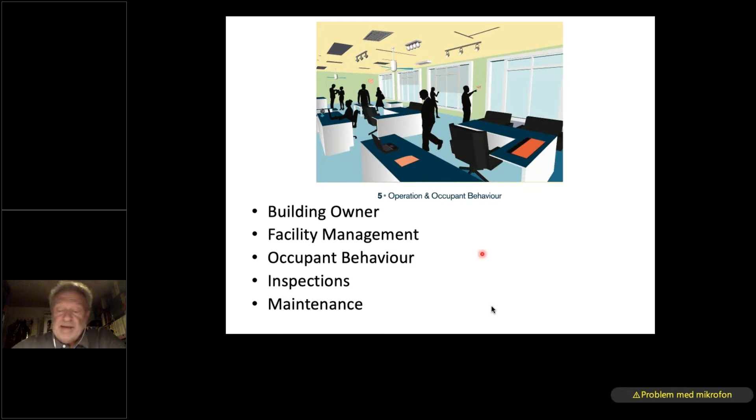We know from literature, from several studies - both field studies and laboratory studies - that occupant behavior can affect the energy use by more than 300%. We have seen from identical dwellings that the highest energy user is typically 2 to 3 times higher than the lowest.

Here are some data from more than 290 identical housing units in Denmark, so we are mainly talking about heating - only heating I'm talking about now. We should see on the graphic at the bottom that there is a huge distribution of the energy use in kilowatt hours per square meter per year, and here the number of housing. So we have some who are using very little, and some who are using 20 times as much as the lowest. It's about the same type of families, the same type of houses, but that's the variation you can really get in energy use.

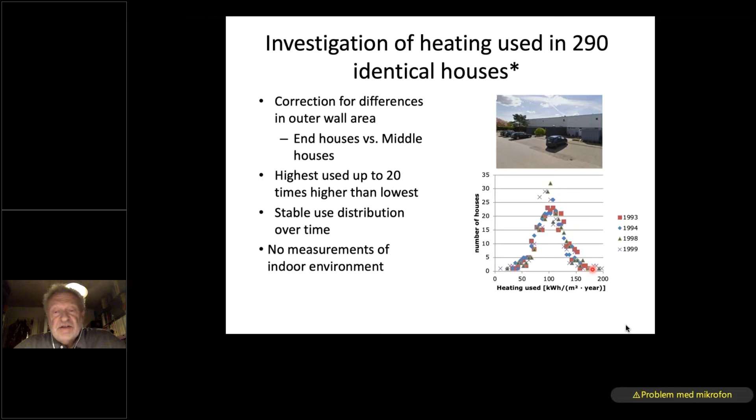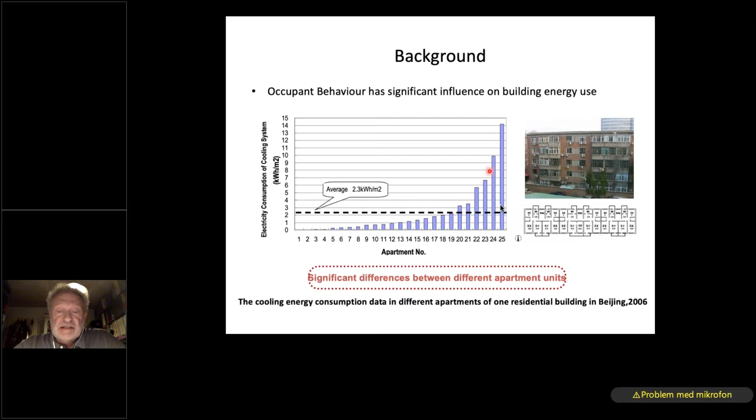Here's another example where we can see there is discrepancy between what we predict buildings will use and what they really use. For more than 135,000 Danish houses, we did calculations of the predicted use for their energy certificates - we have to do that for all new buildings, they need to get an energy certificate. And that's what we calculated. Depending on category A, you have a very low energy use - that's normally a newly constructed building with very good insulation and triple pane windows. And G is a very high level of energy use.

If you now look at what those buildings actually used - this is measurement of the actual use - you see that for low energy buildings, down here at A and B, we predicted they would use much less than they actually are using. But if we look at buildings with high energy use, in fact they are using less than we predicted. We had, at the beginning, a little difficulty explaining that.

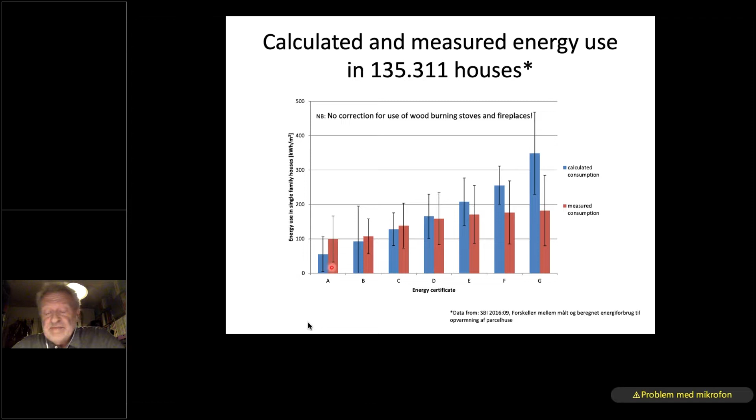It may be difficult for you from Brazil to understand, because in Denmark it's still mainly heating. Many people have their own fireplace or closed fireplace where they can do wood burning, and a lot of people, especially in old houses which are not well insulated, use this fireplace a lot - so the energy use is much smaller than we predicted. But for new buildings, which is where we are now, it seems like we are predicting lower energy use than we in fact get. So we are on the way to developing towards new near zero energy buildings.

If you're using traditional technologies like higher insulation, better windows, heat recovery, and building airtight, we also need to look at the HVAC system - for example, demand control ventilation so you don't ventilate more than needed, solar shading to control overheating, and daylight to reduce the cooling needs, control of lighting, and possible times of the year where it makes sense to open windows.

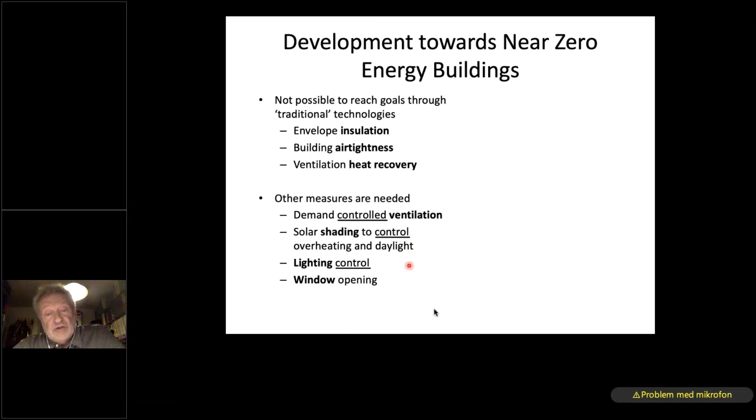So if you look at what the user can influence, those on top we can call robust technologies, because there's really no user interaction needed - the system works without people in the building.

But if you go below for the systems where the user can interact, they can change the setting, they can change the shading, and they can change the control. So they are very sensitive to occupant behavior.

We know from studies and literature that this behavior has an impact both on indoor environment and energy. And if a change occurs in a building that produces discomfort, people will react in a way so they try to get back to comfort again.

One thing is you can adjust to the environment. That means you can change your clothing if it's getting too warm, you may be able to lower your activity level, or lower your posture.

You could also have hot and cold drinks, but that doesn't really help that much. You can also adjust the environment by changing thermostat settings, maybe opening windows, changing the light and the shading.

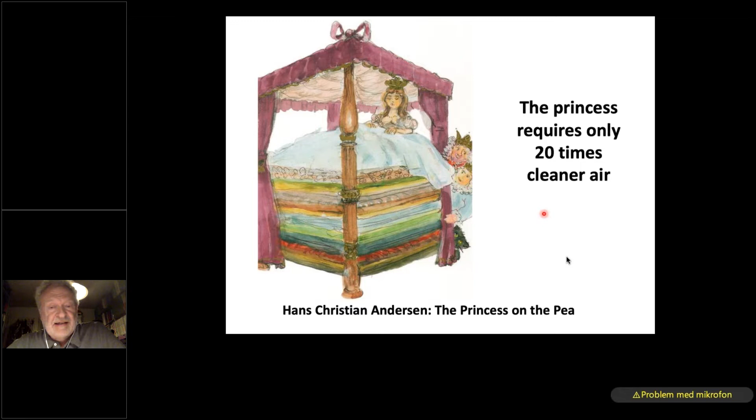When we talk about people, there's a big difference in what people prefer and how sensitive they are. There are some people who are very sensitive, like the princess and the pea from the fairy tale of Hans Christian Andersen - she can feel a pea which is below ten mattresses. If people are that sensitive, they would require an acceptable air quality with 20 times as much fresh air. So it's impossible to satisfy everybody, because we are individually different.

So occupants sometimes have to modify, for example, their clothing so they can all feel comfortable. There are ways to say how much adjusting clothing will impact the felt temperature. For example, if you take off a thin sweater, that would be the same comfort feeling as reducing the room temperature by 1.3 degrees.

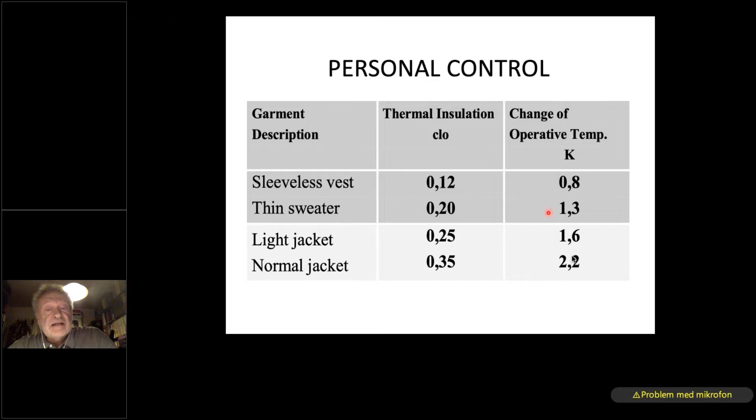So we have some possibilities to satisfy people through individual adaptation.

Occupant behavior has, during the last 10-20 years, been the focus of many research activities. The International Energy Agency has different annexes working on different topics, and we've had two annexes working on occupant behavior. We started a year or two ago a new annex on occupant behavior-centric building design and operation, which will generate a lot more knowledge.

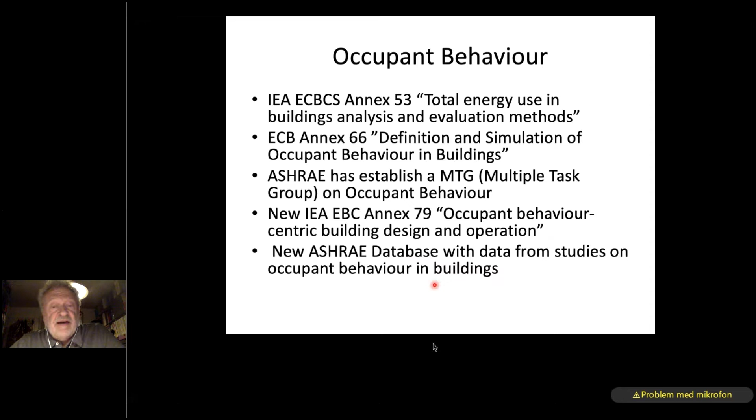ASHRAE has also put some focus on occupant behavior. We've started a multiple task group - not quite a TC yet, but the beginning of one - working with members from different TCs on the issue of occupant behavior. Recently we had an ASHRAE research project establishing a database with data from studies on occupant behavior in buildings, which researchers can now use to make new models or verify existing ones.

I'll give you a couple of examples of occupant behavior and its impact. Here's a case where we measured energy use and indoor environment in 39 apartments, where people paid according to how many square meters the apartment was - total energy use for the whole building was divided by the number of square meters. Then we had another apartment building with 17 apartments, where each apartment had its own energy recording.

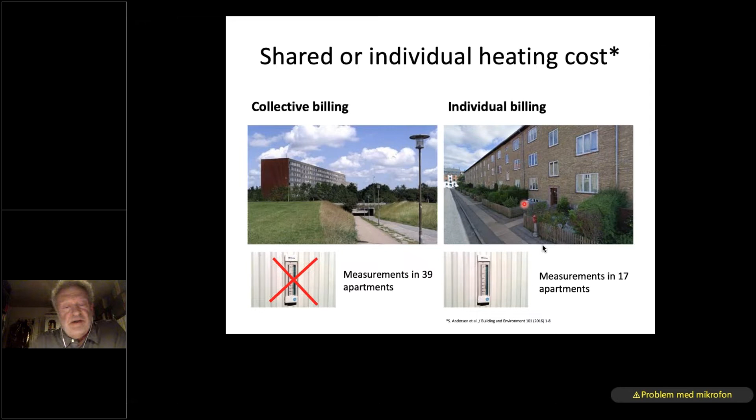They measured the energy for each individual apartment, and that influenced how people used their building. Looking at the broken lines - this is the proportion of the period where people have a temperature above a certain level - these are all from the building where people had individual meters. The average for those people is shown here, compared to those paying by square meter. You see that people who paid by the square meter kept a more comfortable temperature than the others. The others really tried to save energy by keeping a very low temperature in their homes, which may not be very comfortable and may also risk condensation and mold growth if the temperature is kept too low.

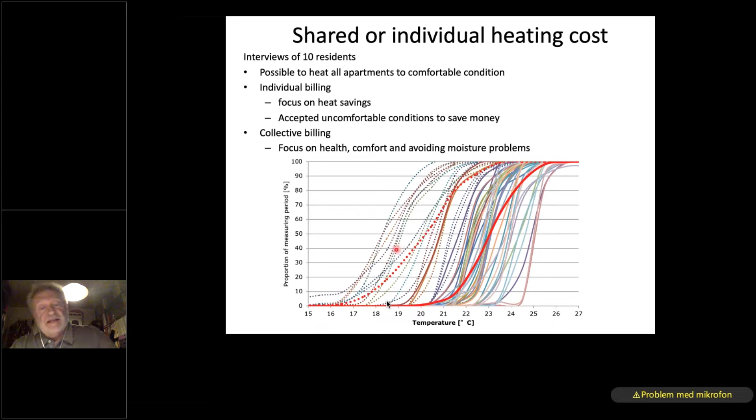We saw the same also with humidity. When we look at the ventilation, shown by the CO2 concentration, a higher CO2 concentration means you are ventilated less. Again, we saw that those paying by individual metering were not ventilating as much as the people who were paying per square meter.

So this influenced how people behave. Many people check their email each hour, their Facebook account, their bank account maybe once a week. But the energy meter, very few people are looking at every month on how much energy they're using. Maybe once a year when they get the bill for the energy. So people have no feeling about their actions and how it relates to the energy.

So feedback to people about their actions is also important. We will see more of that when we go into digitalization. We will have more sensors where we can get feedback to people on their occupant behavior.

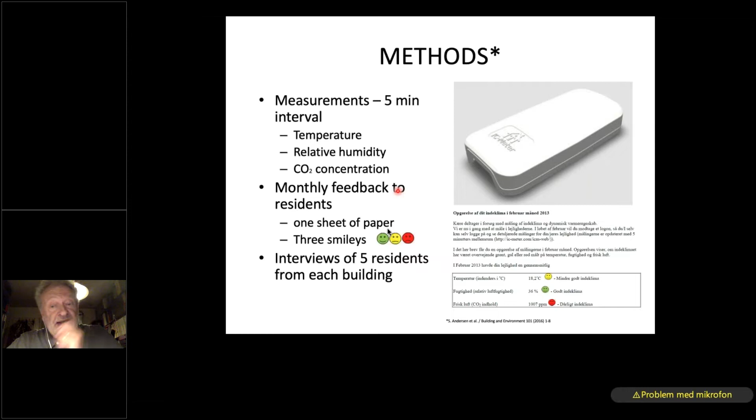We had another study where we were looking at feedback also, where we measured the indoor environment - temperature, relative humidity, and CO2 concentration - to relate to how much you ventilate. Then they got monthly feedback on their energy use, but also on the indoor environment. Each apartment had sensors. We could also record the window openings and when they changed the heating set point.

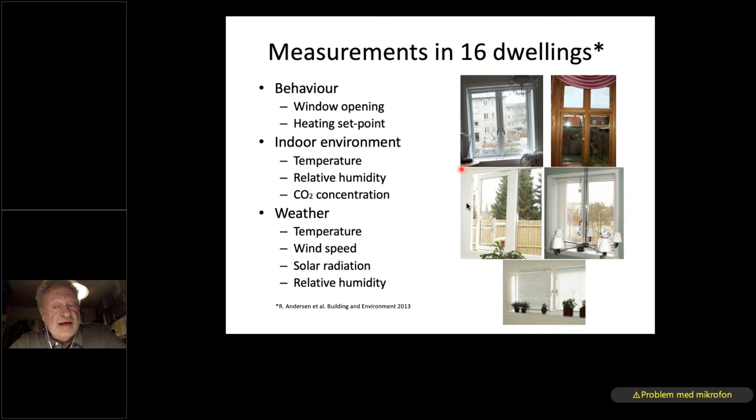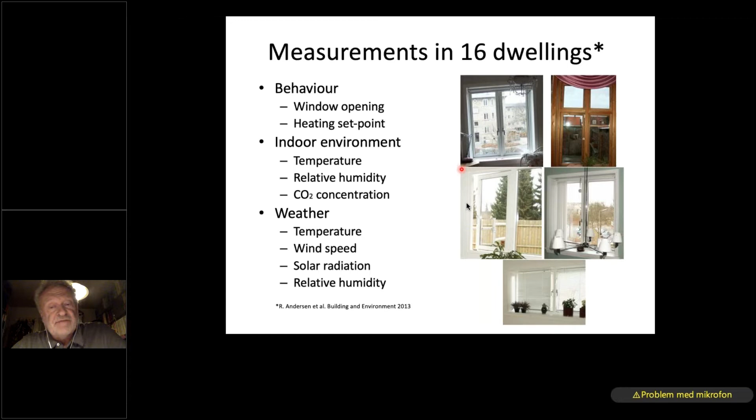Together with the outdoor environment and indoor environment, we got data so we could try to predict window openings from, for example, outside temperature, indoor temperature, or CO2 concentration. So we wanted to get some data for doing simulation of occupant behavior.

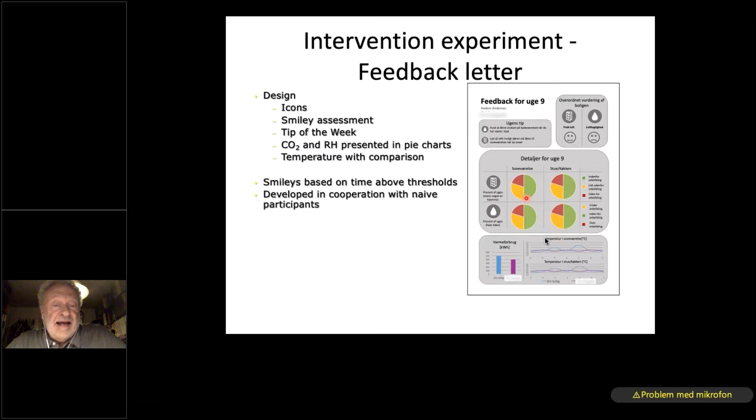We also gave some feedback. This was very simple feedback using smileys or icons telling about how they had been doing regarding energy use, how they had been doing regarding the indoor environment. So they got a feeling for, and could relate some of their actions in the house to the energy use.

In this way, we could persuade them, for example in the heating period, to run with a little lower temperature in the living room. We had a reference group in the same time that didn't get feedback. They did change the temperature in the living room a little, but not as much as those getting feedback. And the same was related to ventilation.

So feedback to people can help them behave better, so they get a better indoor environment, but also often they don't waste so much energy.

Let me give a couple of examples from schools. We are looking at a lot of schools because often the indoor environment in schools is not very good in many countries, also in Denmark. And many schools in Denmark, the ventilation is depending on, for example, window opening.

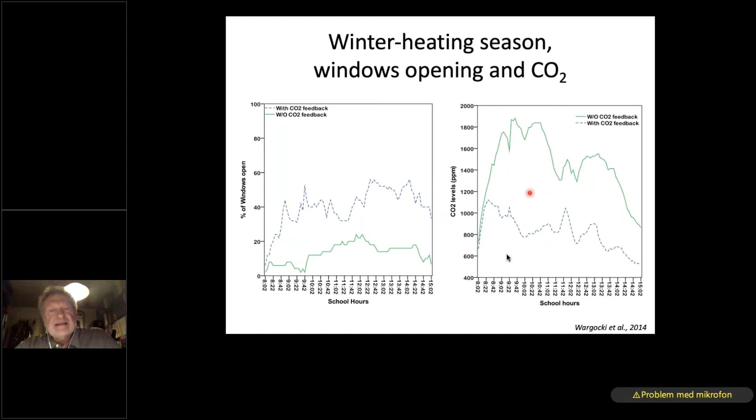In Denmark it's cool outside during winter, so they don't want to open the windows because they know it will be drafty and they can feel the cool air. That results in very high CO2 concentration. But if they get feedback that the air quality is bad, then you get lower CO2 concentration.

If you now look in summertime, without any active cooling in the classrooms, you see they are opening the windows a lot. And it doesn't really matter to give them feedback or not - they are very good at opening windows.

But the reason they open the windows is not because of bad air quality - it's because the temperatures are getting high. With a little lower outside temperature, they feel they can cool the classroom down by opening windows and doors. So again, it's not the air quality that makes them do the right thing and get more ventilation - it's the temperature.

So if you now give those people cooling in the classroom during summer, then we see the green line - they don't open the windows anymore.

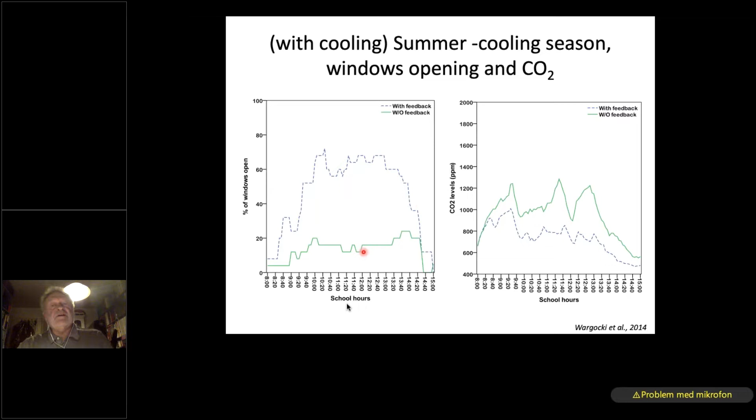No, the green is when they don't get feedback. When they don't get feedback, they don't open the windows anymore. But with the feedback, again, they open windows. So these are some of the things where, for example, feedback to the teachers is very important.

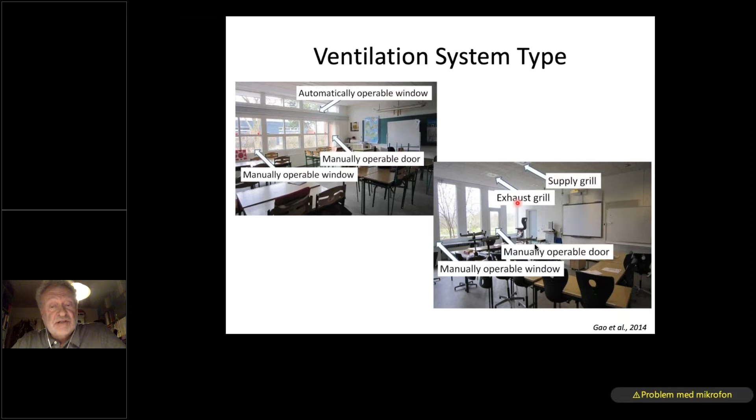So we looked at different ventilation system types in buildings. We had manual operable windows, automatic controlled opening of windows, maybe combined with exhaust, or we had a balanced ventilation system. And you see the ventilation rate, which relates to indoor air quality.

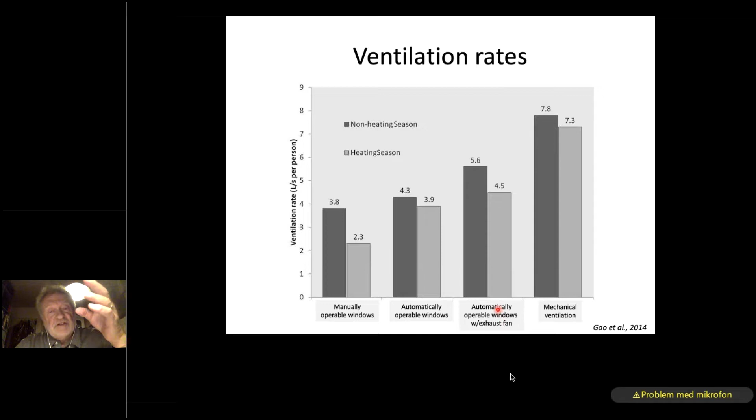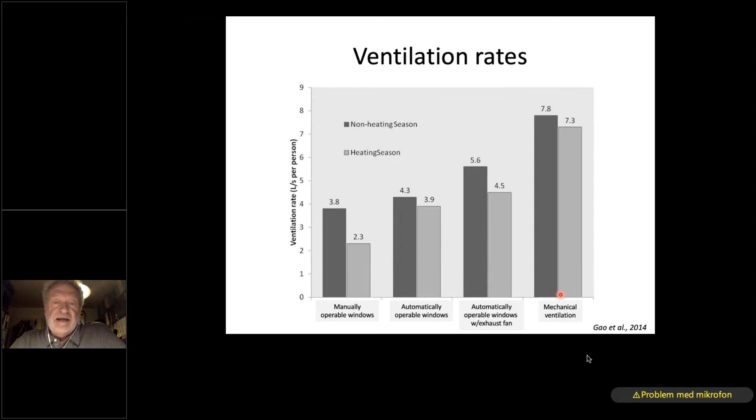In the non-heating season, they had more ventilation. That is, in the summertime, they had more ventilation. That's black in all types of ventilation system. Here is manual operable windows, automatic opening of windows according to a CO2 sensor, automatic opening of windows combined with an exhaust fan, which gives you more ventilation, and mechanical balanced ventilation. So you see, the mechanical balanced ventilation more or less guarantees you the right level of ventilation.

There are many factors that can influence what people are doing. So window opening drivers could be things like feeling too warm, and it's summertime. The heating set point depends on the temperature and so on. Also window and blind use may be influenced if you want to look out. Is it a nice environment? Do you want more daylight? So many things can influence how people behave.

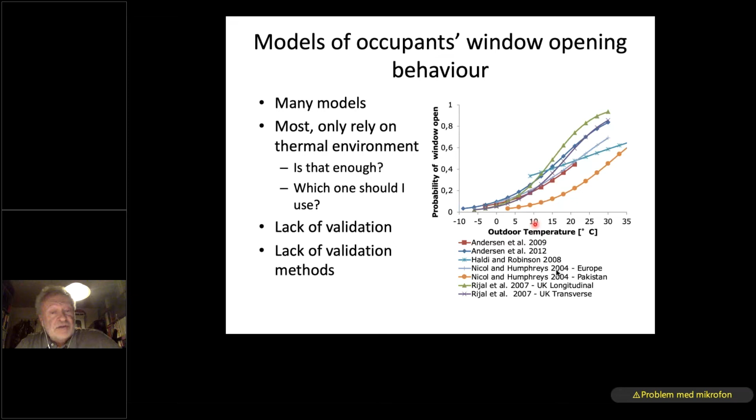And what we would like to do is model human behaviors. We want to know more about what the drivers are, and that's why we need data. That's why ASHRAE established this database. So here is a prediction: what is the probability that you will open a window based on the outdoor temperature? These are different predictions, and you can build these predictions into a computer simulation. I'll just skip this one here.

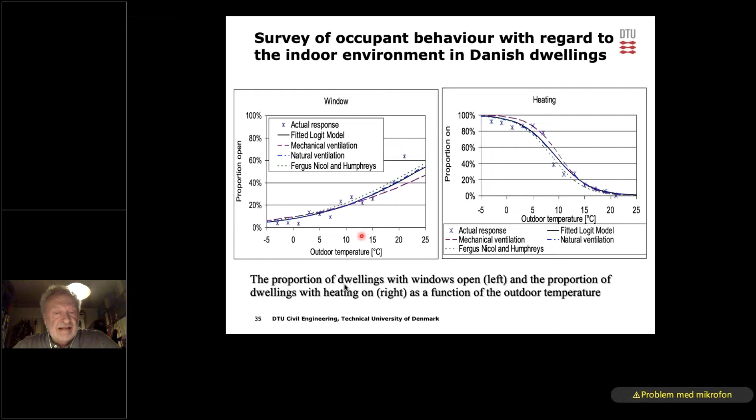So to establish different models, for example on window openings and set points depending on outdoor temperature, we need data so we can make these relations. There has been a lack of data, but we are seeing now from different activities, including the annexes I talked about, that we are getting more data.

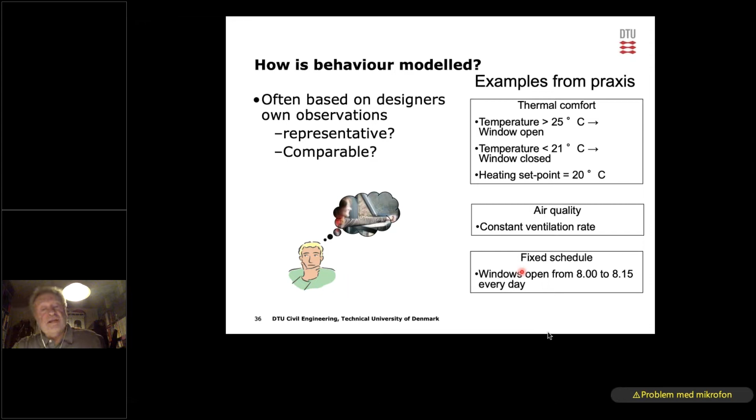So today, when you simulate a building and the occupant, it's often based on you deciding how the occupant behaves. For example, you say when the indoor temperature gets above 25, you start the air conditioning or open windows, and when it gets below 21, you close the air conditioning. For air quality, normally you have a constant ventilation rate. Now we have a bit more with demand control ventilation, but often it's a constant rate and a fixed schedule. For example, for window opening in schools, they are open between this hour and this hour.

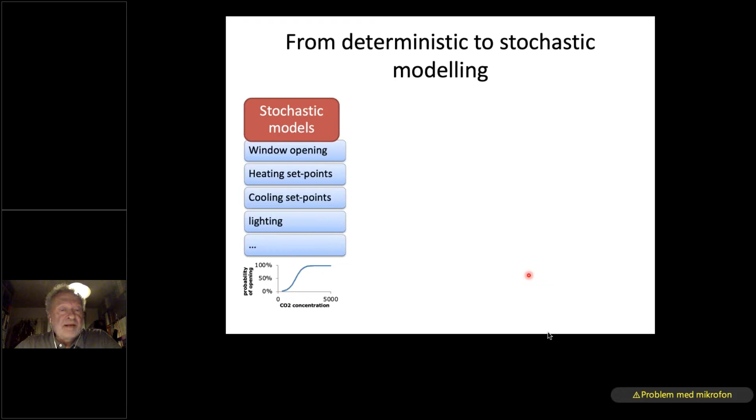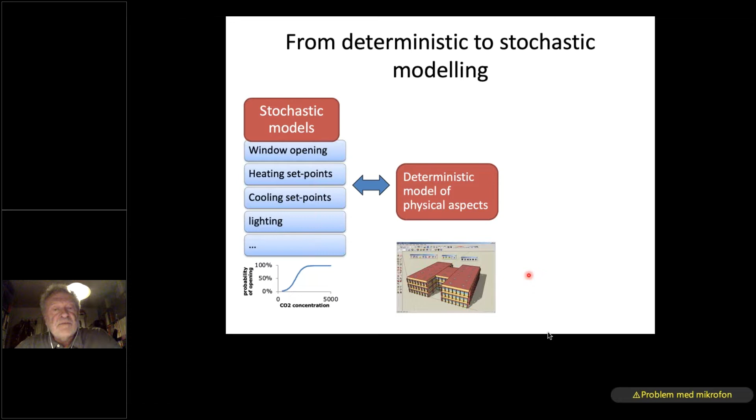But people are not acting this way. They act more in a stochastic way. So in the future, instead of deterministic modeling of buildings where you get one number for the energy use, we probably will see more use of stochastic variables—stochastic variables of how people change set points, window openings, and blinds.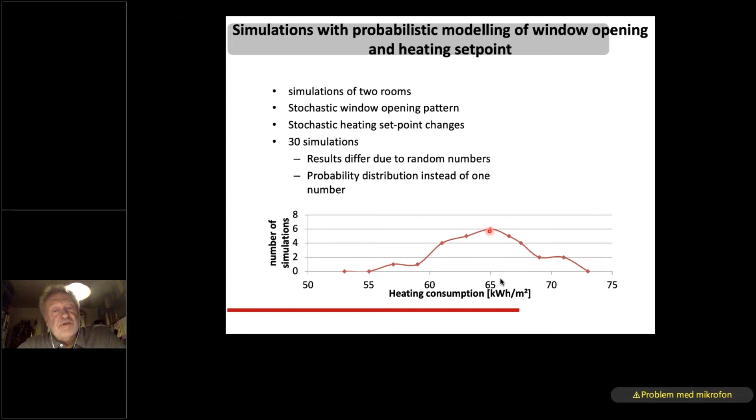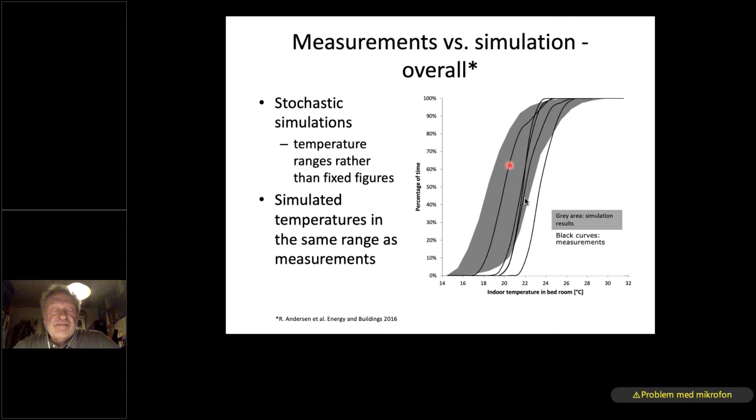So we will see more, instead of getting one value, a distribution, like I showed in the beginning. But we would not like to see just a narrow distribution because it's robust—we'd like it to move to the left so we have low energy use.

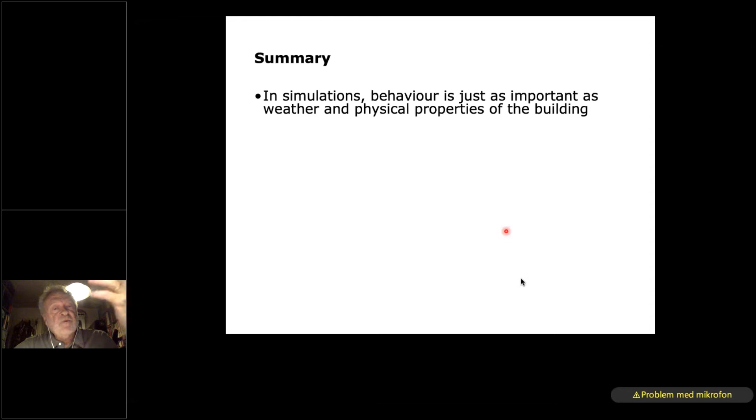So in summary, in simulations, behavior is just as important as weather and the physical properties of the building. We will never get to zero energy buildings if we are not working with the occupant and taking occupant behavior into account. Models of occupant behavior implemented in existing simulation software—that is something going on now. It's not readily available in many software yet, but the process has started.

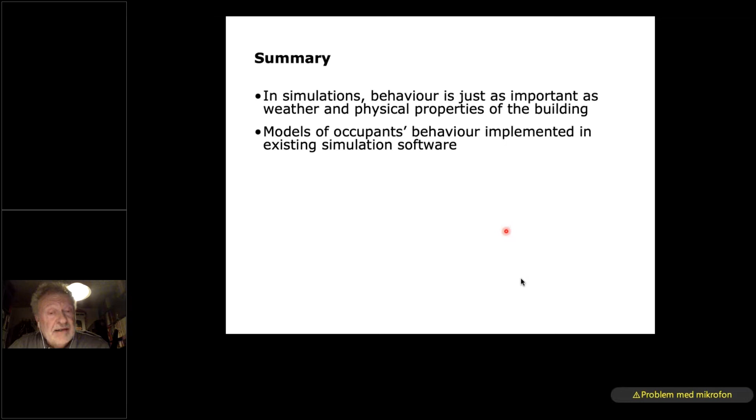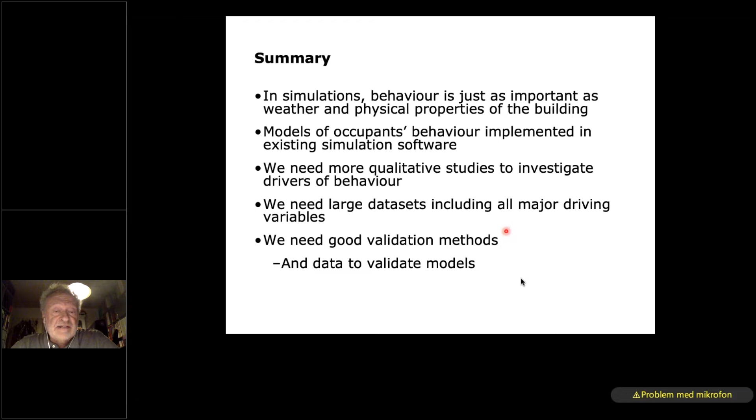We need more studies to investigate the drivers: outside temperature, indoor temperature, indoor air quality by CO2 concentration, or others. We need large data sets including all the major driving variables, and we need good validation methods and data to validate the models. ASHRAE is playing an important role in this activity, along with the work performed in the older annex and the new annexes. Thank you for listening.

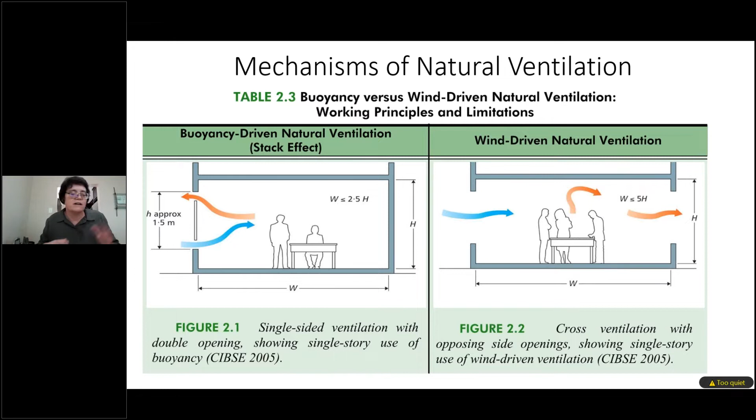Or wind-driven natural ventilation, because you have a high pressure side and a low pressure side on one or the other side of the building.

Natural ventilation is not new. This is a picture from Robert Boyle back in 1899, where he wrote a book called Natural and Artificial Methods of Ventilation. And this little sketch, it's funny.

In the little sketch, it says that the whole reason that he was trying to pursue natural ventilation was to prevent products of respiration from infected scholars from getting to each other.

So it's obvious to most of us who've taken fluid dynamics, that natural ventilation only works if there's at least two openings.

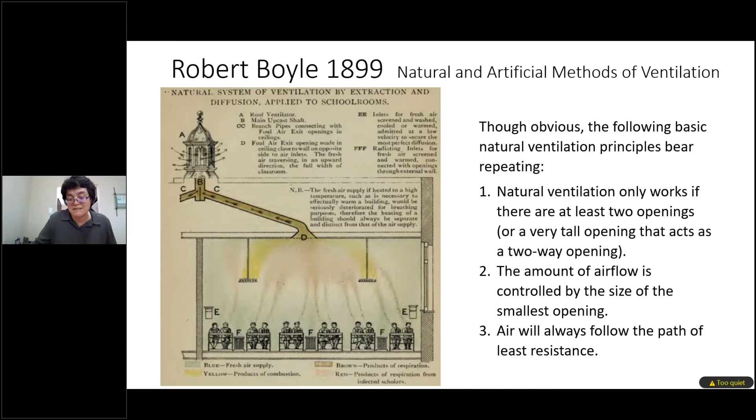The amount of airflow that you get is controlled by the size of the smallest opening, and that air will always follow the path of least resistance. So those are just basic physical principles, but sometimes we have to re-explain that.

Now ASHRAE has actually broken up natural ventilation into two pieces. One is what I call natural ventilation.

Ventilation is the word, the same way that we use ventilation when we're talking about mechanical ventilation, and that is related to indoor air quality, and therefore it is governed by ASHRAE standard 62.1.

When we talk about outside air being used to keep people comfortable, that's when we talk about it as natural conditioning, and that is governed by ASHRAE standard 55. So that's where your thermal comfort is basically controlled.

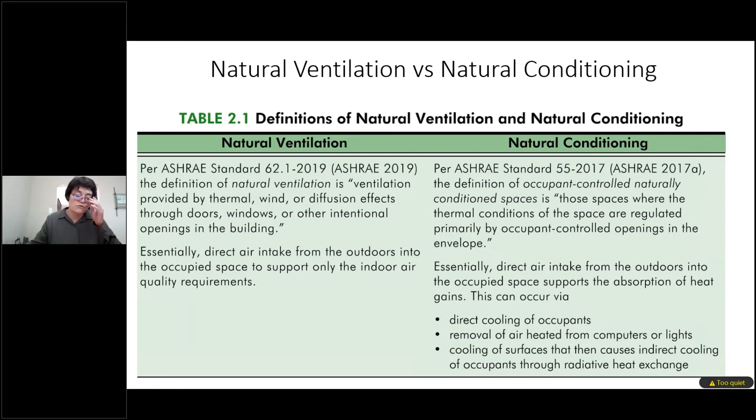So it's important to keep those two different, because there's two different criteria that you have to meet in order to comply with those standards.

So obviously the other key international standard that ASHRAE 55 in particular is linked to is the CIBSE, or the Chartered Institute of Building Services Engineers, basically the UK version of ASHRAE.

It's their applications manuals AM10, which is for natural ventilation, and AM13, which is for mixed mode ventilation.

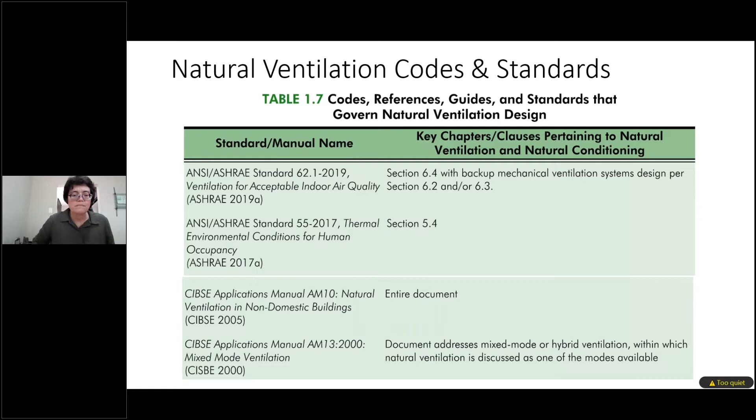So you might ask, what is mixed mode ventilation? Mixed mode ventilation is when you can only use natural ventilation in a certain time of the year or a certain portion of the building.

And so you can either have concurrent mixed mode systems where you have natural ventilation for air quality, but you still have cooling.

You can have it as being a changeover, where sometimes a place is naturally ventilated and sometimes that other place in the building is cooled and you shut the windows.

And then the third type is zoned design, where just a portion of the building is always air conditioned and a portion of the building is always naturally ventilated.

So when we wrote the book, we really said understanding that those are the ways to understand natural ventilation, is how do we know it's going to work for our building, or what would it take in our design to make it work for our building?

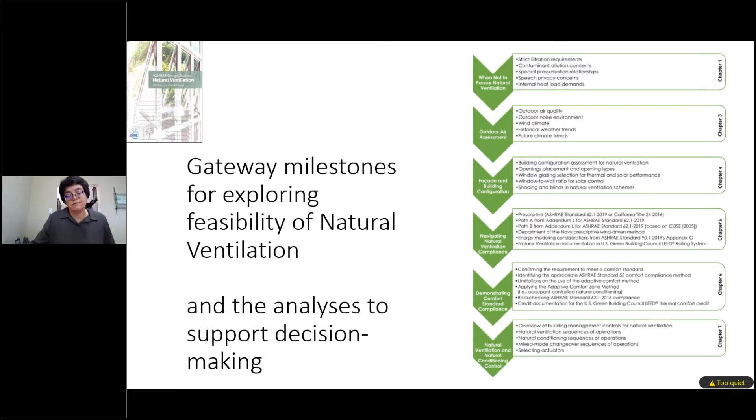And so we have this sort of gateway approach, and if I just blow up those titles for you, these are essentially the key themes of the chapters, right?

So when should we not even bother pursuing natural ventilation? What do we need to look at in terms of the outside air assessments, facade configurations, the two compliance methods, both the ventilation compliance and the comfort compliance, and then how do you control it if you start having devices that help you to control it?

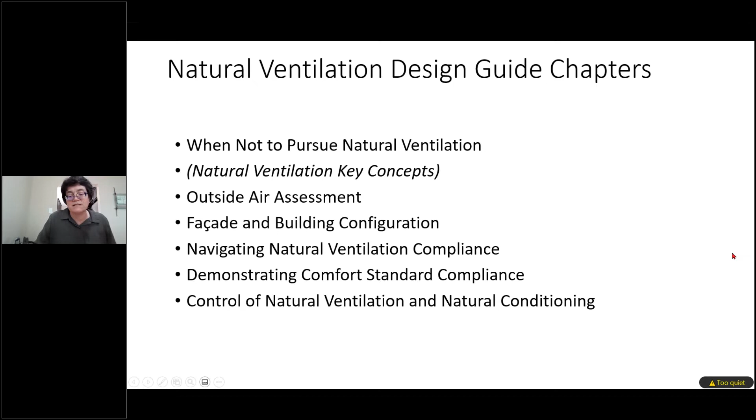So the key thing I always try to encourage people to talk about with their owners, if they're a designer, at the very start, is when do you not pursue natural ventilation?

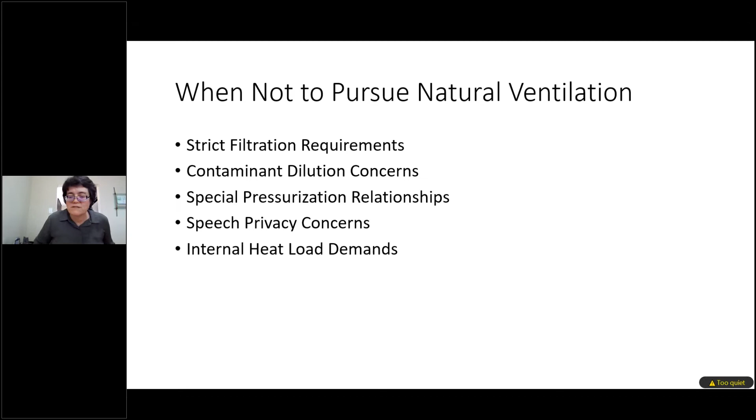This is related to when you have strict filtration or contaminant dilution concerns, if you have any pressurization or speech privacy. And in particular, you have to check what your internal heat loads are.

What CIBSE says is that your ability to absorb heat is limited by the incoming air temperature, which is equivalent to what you'd have as supply temperature. On most days when you'd have the windows open, your outside air temperature would be very close to your indoor air temperature. CIBSE recommends sizing natural ventilation systems for no more than 3 Kelvins, or 3 degrees Celsius, difference. But against the ventilation rate of what comes in through the window, that means you're limited to perhaps only 10 watts per square meter on the low end to maybe 28 watts per square meter on the high end, inclusive of all the heat loads from inside the space you'd want to absorb. So it's important to have a high performance facade to keep solar gains out, and a low internal heat load density.

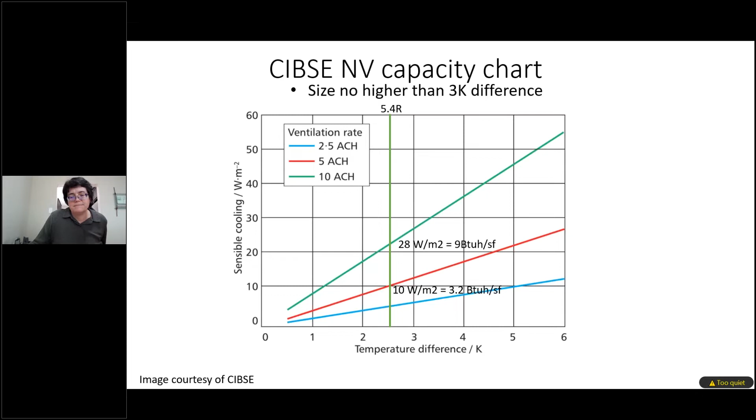Related to that, you also have to manage the client's expectations about key topics like indoor air conditions. People perceive that they'll have better indoor air quality inside, but sometimes people will be uncomfortable. The other argument that often happens is: who has control? Do people have control over the windows, or are they in a situation where they don't get to open windows, change into lighter clothes in summer, or move around for more air movement? Those situational constraints may kill a natural ventilation scheme.

And last but not least is the cost of ownership. The owner may think natural ventilation will increase market value, but it may also increase operational risk as outdoor air temperatures rise over time. So I encourage people—and in the book we have charts that help weigh the most common arguments for and against—so you can have conversations with owners about what it will be like for people in the space interacting with these systems, and whether that's seen as valuable.

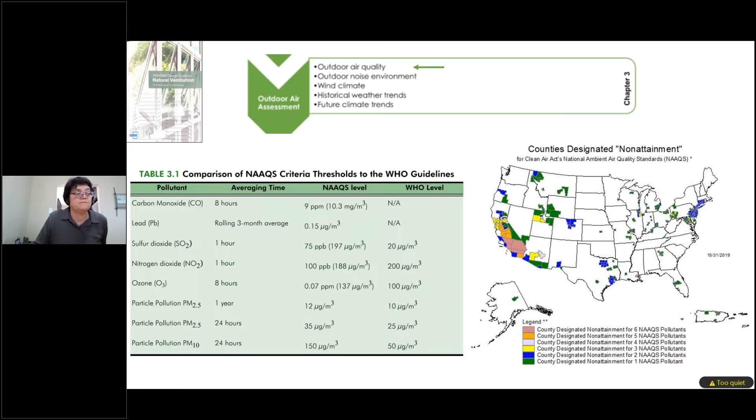The first thing we always have to do when looking at a natural ventilation scheme is remember that we don't have filtration of outside air. So we need to check that our outside air is pretty clean to begin with. In the United States, we can go to a federal government website to look at air pollutants, and see if they're even in non-compliance, whether the pollutants meet acceptable outdoor air conditions. If you can't even meet outdoor air conditions for particulates or sulfur dioxide or chemicals like that, why would you want to bring more of that air inside without any filtration? So that's something that always needs to be discussed with the owner—how good is your outside air?

The other thing I'd recommend looking at is whether you can rely on wind-driven ventilation, or whether you have to design around buoyancy-driven ventilation, which has much less capacity to move air. With wind, your problem is always how to keep the air out so you only get the amount you need for cooling. With buoyancy, since it's driven just by heat loads in the space, you don't get very much air change out of it. So it's always useful to do a wind rose analysis—there are a couple of free programs available that can help people do that relatively quickly.

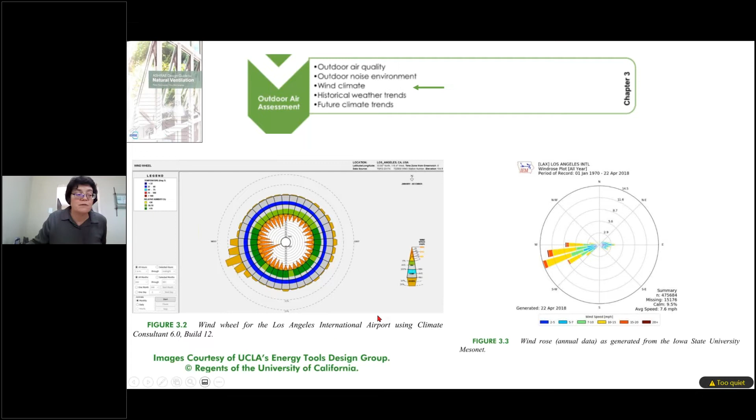Then the other thing we always have to check is whether we have the right weather outside to make it financially viable to pay for operable windows. If you're in a climate that's very cold in winter, very hot in summer, or very humid mid-season, and you can't get at least 30% of the time where you could have windows open, you have to question whether it's worth buying that spare system. Most places in the world can't maintain ASHRAE 55 comfort through natural ventilation 100% of the year—they'll need some heating and perhaps some cooling during certain periods. So operable windows may be an additional cost on top of a baseline HVAC system you already bought.

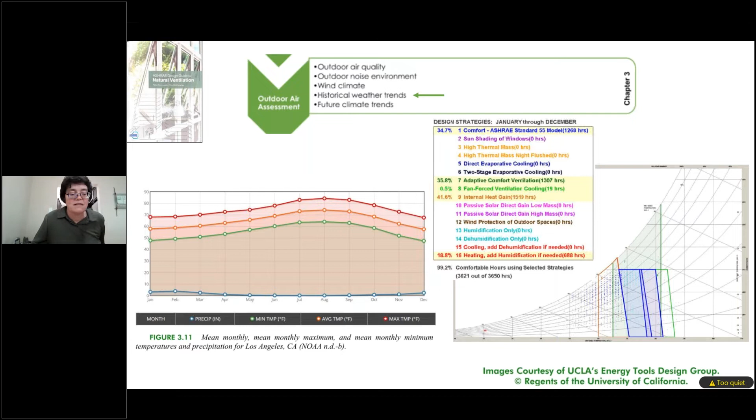With mechanical systems, we always upsize our coils in terms of capacity to accommodate future global warming. But your entire building's comfort could be put at risk depending on how much your local area is anticipated to rise in temperature over the next 30 years. So I encourage professionals recommending natural ventilation to clients not to base it just on looking backwards at 30-year weather files, but to look forward using a climate-shifted file purchased from energy analysis software vendors—a shifted EPW file—to see what conditions would be like in that location in 2050.

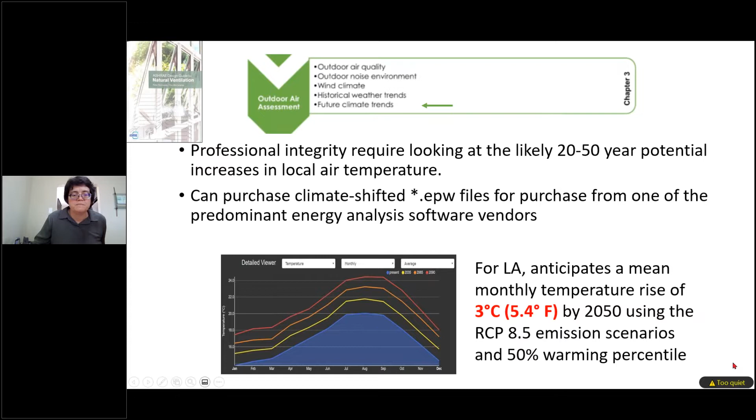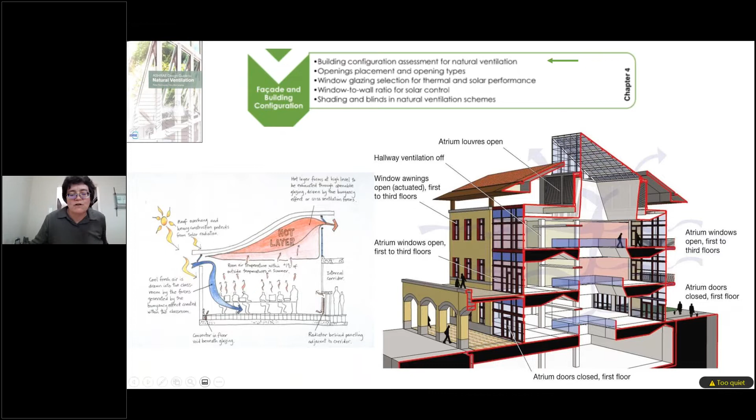Once you understand you have the right climate and the right outdoor air quality, and you still want to proceed with natural ventilation, we need to work together to structure all the building's openings so you can take advantage of buoyancy or wind-driven ventilation. This takes a lot of coordination with architects, because they typically specify window location and size, not the mechanical engineer—yet the comfort conditioning is completely dependent on those choices. So we have to work very closely with architects to achieve that.

The other thing to bear in mind once we know where we want the windows to be is what kind of windows we want and how people will get access to them. Sometimes we put motors on them so they close overnight, or because they're too high near the ceiling for people to reach. Sometimes we have to figure out shading devices, because if a shade is mounted to the wall above the window and you pull it down due to glare, you cut off all the air coming into the building. So there are devices where you can mount shades directly onto the window mullion itself.

With tall buildings and high-rises, there's often a limitation on how big the window opening is allowed to be, so that things don't fall out and hurt somebody below. Codes often limit how big this opening can be, which may restrict how much air can come into the building from a natural conditioning standpoint.

So once you have the right set of openings and can get airflow movement across the entire building, you have to check whether you have enough airflow to meet ventilation standards. Just because you can open a window doesn't mean there's enough heat source or wind power to guarantee that every hour the building is occupied, you get enough ventilation air to match the same table in ASHRAE 62 as you would with a mechanical ventilation system. There are now three paths available within ASHRAE 62.1 to prove you have equivalent ventilation from an air quality and health point of view.

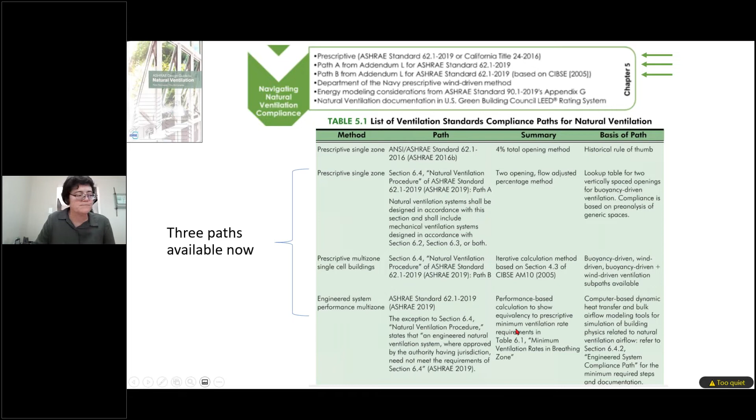There's one path which is a lookup table, a hand calculation or spreadsheet approach. There's another which is an iterative calculation using a single cell multi-zone model. And then there's a full engineered system approach with a multi-zone model, usually dynamic heat transfer and bulk airflow modeling tools.

If I use one of those and run it through the system, I'm comparing the actual ventilation I'm able to achieve based on window size and external influences from my weather file versus the minimum requirements for meeting the ASHRAE 62 threshold flow rate—liters per second per person or per square meter. So the engineering analysis carries the burden of proof that you can meet equivalent ventilation requirements, and I usually do that using an 8760-hour file.

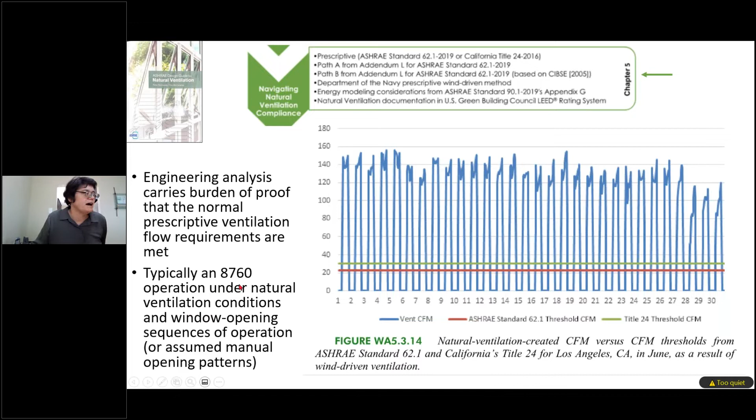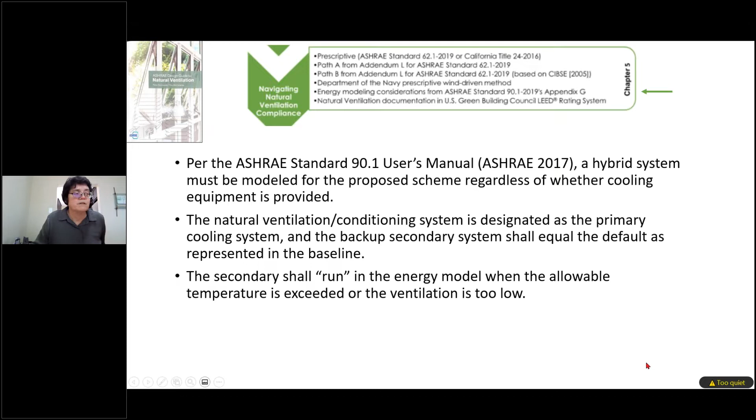ASHRAE standard 90.1 doesn't let you get away with looking only at those hours where you have enough ventilation air. If you have hours where the outside air conditions, statistically speaking, cannot be guaranteed to deliver your ventilation air quantity, you have to have a secondary backup system that brings in the ventilation air for you, and it runs whenever the energy model shows the temperature is exceeded or the ventilation is too low. That's important if you're trying to say natural ventilation is saving you energy in your ASHRAE 90.1 energy model. Then we have to look at people's comfort inside.

Now, the important thing to understand is ASHRAE 55 is a completely different standard. Usually when people do natural ventilation, they follow one of two paths. One is the elevated airspeed path, where you put ceiling fans overhead and just move a lot of air at you. The other path is called occupant-controlled naturally conditioned spaces, used to be called the adaptive comfort method. What you'll see here is very interesting.

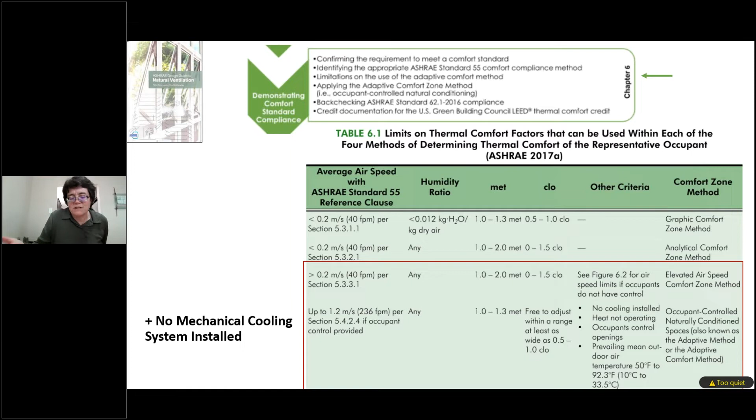You're allowed in the adaptive comfort method to have a much higher flow velocity coming across people's skin, but you're only allowed a limited amount of metabolic rate. So it's basically like offices and classrooms and whatnot. People have to be able to adjust their clothing to accommodate. You're not allowed to have any mechanical cooling installed at all, or else you cannot use this method, because they say if the cooling is there, people will just turn it on, so they would not extend their expectations of comfort accordingly.

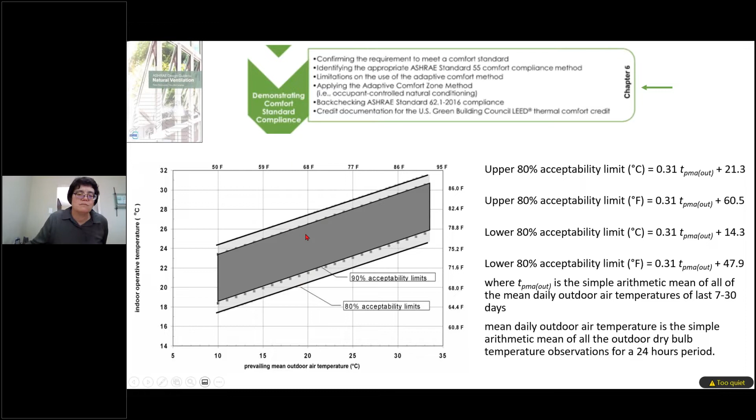So if you do have that situation and want to follow that bottom path, you use this diagram, which shows that people's understanding in their head and physiologically of what they will allow for a comfort temperature increases depending on what the outdoor temperature on average has been. ASHRAE would like us to use a rolling average of outdoor air temperatures for the last 7 to 30 days, and that would set your lower and higher acceptability limits. If you can deliver inside the space between the 80% acceptability limits for all hours in the year, you would be shown to be in compliance with the ASHRAE 55 comfort standard.

So the key steps here are to evaluate the design against the operable element requirements, run it, and if you don't have enough opening, you need to make bigger openings with the architect. Calculate the comfort zone thresholds, do the dynamic analysis, and then resolve the comfort conditions if it's non-compliant. You do have to do it space by space by space.

When we look at the question between that rolling mean calculation versus a flat mean, which just takes the average mean temperature for the month, if you're at a very early phase, you could probably just use a flat mean calculation and find the mean temperature for the month to do the calculations. The shape of how many hours of exceedance does not change very much, but the actual numbers in each of the colored boxes do. Doing a quick analysis this way tells us, without any extra fan movement, the number of hours per month that would be comfortable.

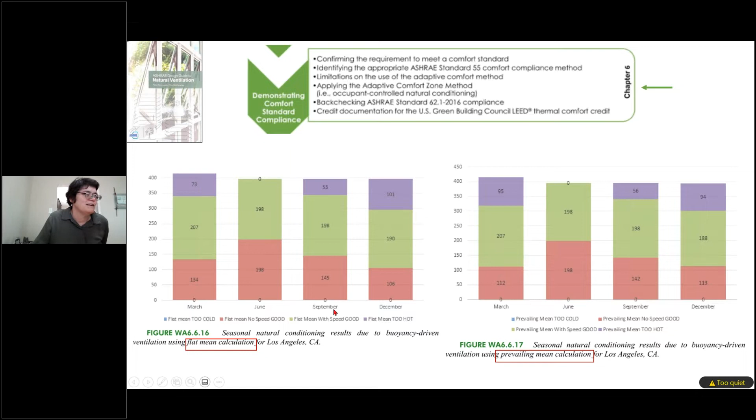If you had increased airflow with that elevated speed method, you would be able to be comfortable for these extra hours in the year, and the purple is basically too hot. This immediately gives you a kind of snapshot per season of how many hours you might need to do cooling or heating in. In Los Angeles, we don't have any heating needs for this particular run.

Last but not least, a number of people like to add mechanical devices and monitoring systems in order to help assess whether natural ventilation is working or not. I'll give the story of that federal building just to wrap us up.

When we first installed everything, people moved in before construction was complete, and therefore commissioning had not yet been finished. Because it was a big, skinny building, I had a pressure sensor that would measure the differential pressure between the windward side of the building and the downwind side. I said, okay, open the windows when there's pressure on this side of the building, because that will be the incoming air, and open the windows less on the far side of the building because that will be downstream.

What happened is I didn't put a delay into the sequence of operation that was long enough, so the windows kept changing back and forth whenever we had turbulent outdoor wind conditions, where the air was moving around from different directions. The people who moved into the building thought it was haunted. They were very disturbed by the idea that the windows were moving and they didn't have control over moving the windows themselves. They had their manual window at their desk, but there were extra windows up top that were moving around. So one of the things I encourage people - we have sample sequences of operation that slow everything down, make recommendations about the types of sensors you might use, the kinds of sequences you might use to override the windows closed if it's too windy or too rainy outside.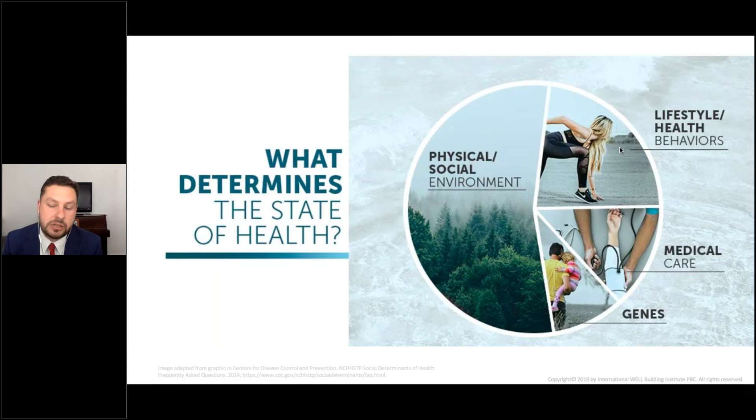Why is this important? I actually studied as a geneticist when I was at university, and I always thought that your genetics was something that was far greater in terms of its impact on your health and well-being. As it turns out, the physical and social environment is the number one determinant of your health, far greater than your genetics, far greater than your access to medical care. So the places that we spend time in, the people that we spend time with, has a much greater impact on our health and well-being than our genetics or our access to medical care.

This is a very overused statistic in our world: we spend about 90% of our time indoors. I think this statistic has been used so often that it often loses significance. But Professor Richard Corsi, some of you might be familiar with the Corsi Code, reframes this in a much better way. He says that the average American will live to 79 years. 69 years of that average American's life will be spent indoors, in a building of some kind. About 5 years will be spent outdoors, and about 5 years will be spent in transit. So it's really important to consider we are spending a lot of time indoors, and if the physical and social environment is the number one determinant of our health, it's important that we're getting these spaces right.

I wasn't able to pull up some similar statistics for Brazil, but I really wanted to emphasize the cost of chronic diseases to our healthcare systems across the world. In Australia, the most expensive chronic disease groups cost the Australian economy around $27 billion. They make up about 36% of all health expenditure. Our leading health professionals say that one third of these diseases are completely preventable. These costs don't even include the lost productivity associated with them, or this idea of presenteeism.

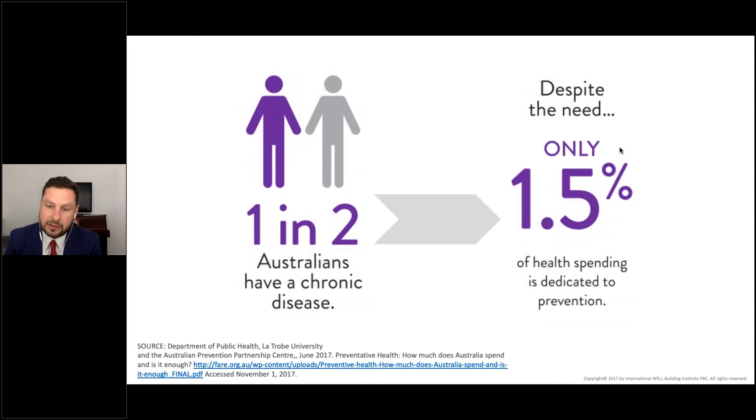We're spending so much time indoors. Our physical and social environment is the number one determinant of our health. This is impacting the rise of chronic diseases across our communities and across our society. Yet we're not preventing these, we're treating them, and it's an unsustainable solution.

So what we're really trying to do with standards is we're trying to position building designers and operations professionals, practitioners, suppliers, and users of these spaces as agents of public health.

I deliver presentations like this across the world almost every day, every week at least. And I always say, if there's one thing that I can really emphasize from this presentation, if there's one message, it's that we all, as building professionals who work in this space, are agents of public health, whether we like it or not. If we're spending so much time in buildings, if the physical and social environment is the number one determinant of our health, we are agents of public health. And what we really need to do is measure, verify, and monitor building features that impact health and well-being. That's what this healthy buildings movement is all about.

I wanted to leave this section with a quote from Dr. Richard Carmona, who's the 17th Surgeon General of the United States. He put out this quote late last year, and he said, 'With the incredible amount of time we spend indoors, buildings must be at the heart of the solution to foster wellness and deliver positive health outcomes at scale. We must embrace a new urgency to achieve our shared vision of advancing health and well-being in all buildings. To be sure, the collective progress we make today to fortify the places and spaces we spend our lives will reverberate long into the future.'

Next, I want to talk a little bit about the WELL Building Standard. I'm not going to go into too much detail about this, but I really want the audience just to have a bit of an understanding of what we're trying to achieve with this standard.

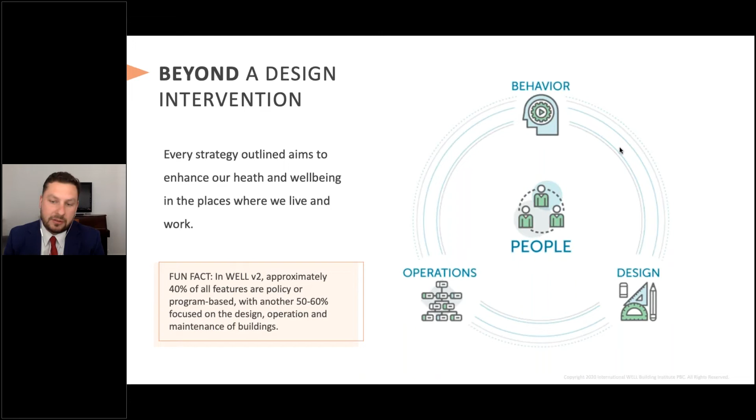So what we're really looking at is a combination of design, operations, and behavior change aspects to how we can actually get the best health outcomes from people within these spaces.

The other aspect of the standard is performance testing. So it's not just about designing for good air quality, it's about testing for good air quality and actually understanding whether the quality of the air within the space is under certain thresholds. This is very important to the standard and to certification.

So we're physically testing air quality, water quality, lighting, acoustics, and thermal comfort. And then depending on which credits or features you pursue, you get different levels of certification.

So I wanted to touch on next what's important in a healthy building. Now, I don't have time to go through every single category or concept of the WELL Building Standard, and I don't think that's the intention of today. But I wanted to touch on three key aspects: air, water, and mind, because I think for this audience, mind is something that is a little bit new and potentially interesting.

So first, let's talk about air. Environmental air quality is a global concern and something we need to address. When we talk about air, it's really important—and I know this audience would be familiar with this—but we breathe in 15,000 litres of air every day, and what we breathe in has a huge impact on our health and well-being.

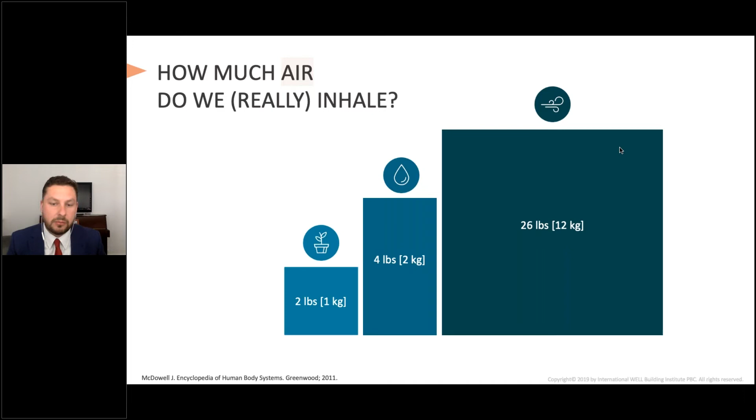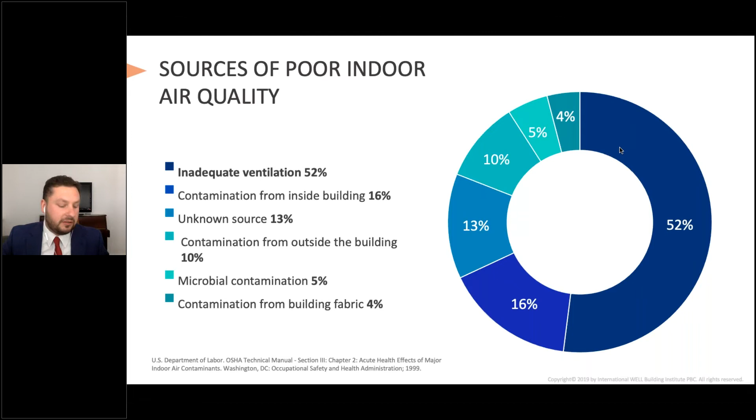What we're really trying to do with the WELL Building Standard is ensure high levels of indoor air quality across a building's lifetime through a diverse range of strategies that include source elimination or reduction, active and passive building design, and operational strategies and human behavior interventions. So we're looking at things like ventilation, operable windows, high levels of filtration across the space, things like MERV13 filtration, reducing construction pollution throughout the design of the building. There are also controls around smoking, maintenance and operation, and we're looking at microbe and mold control as well.

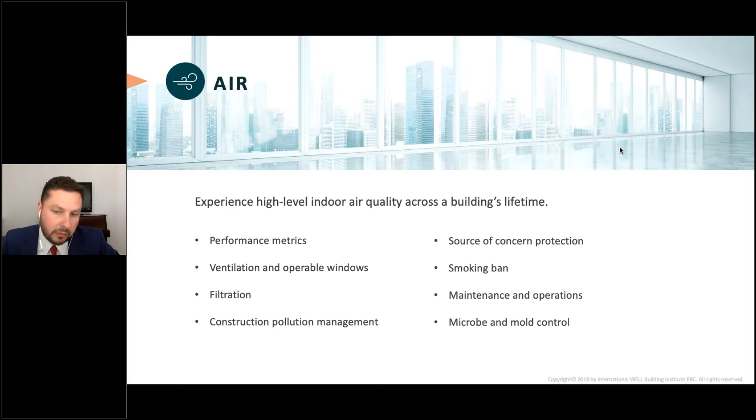The next thing I want to talk about is water quality and really understanding why we need good water quality across our buildings. Essentially, access to safe and clean drinking water was declared a human right by the United Nations General Assembly back in 2010. However, 663 million people still do not have access to improved water sources, and manufacturing and agriculture have introduced new contaminants to our water systems, causing huge issues across our water supply system.

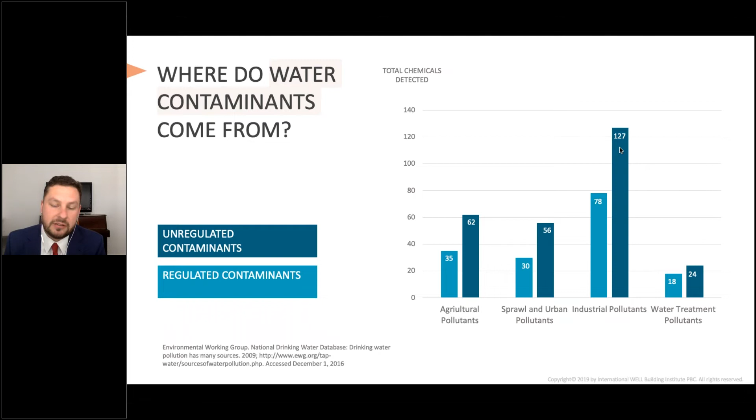So it's really important that we consider how water travels, because this is something that's often confused across the built environment industry. The water supply to a building can be contaminated at the source, in the supply lines, at the building connection, in the building piping, or inside the plumbing fixtures at the point of use. So there are a whole range of different locations where water quality can be compromised, which is why we need to think about interventions.

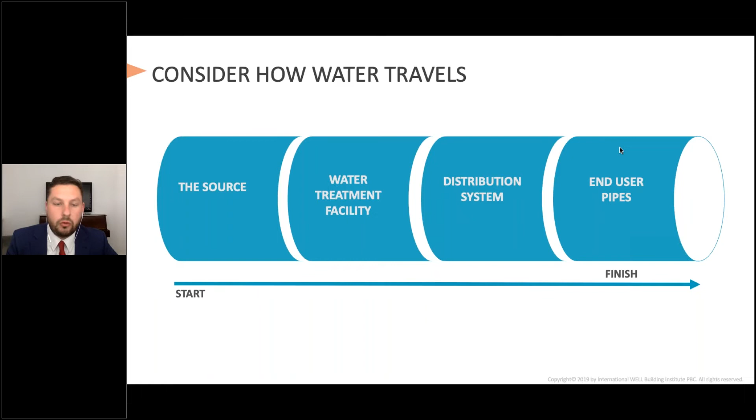We need to think of testing requirements that address the contamination across the entire water supply. So when we're talking about water quality within the standard, what we're really looking at is how we can treat water and understand the quality of water coming out of the tap that people are drinking, and how we can bring transparency back to that process. It's all well and good for a facility manager to measure the water quality, but it's for nothing unless that information is provided back to occupants so they can build trust and have transparency within their water quality system.

We're also looking at design interventions that can promote drinking water access. We're looking at moisture management, and we're also looking at provisions around hand washing as well.

So finally, the last concept I wanted to address is the mind concept, and this is the way our buildings can impact our mental health. Workplaces and buildings can support positive mental health or contribute to poor mental health. An estimated 18% of adults will experience a common mental health condition, such as anxiety, depression, or substance abuse, over a 12-month period, and over 30% of adults will experience a mental health condition during their lifetime. Approximately two-thirds of individuals experiencing common mental health conditions are currently employed. So this is something that is a workplace issue, a building issue.

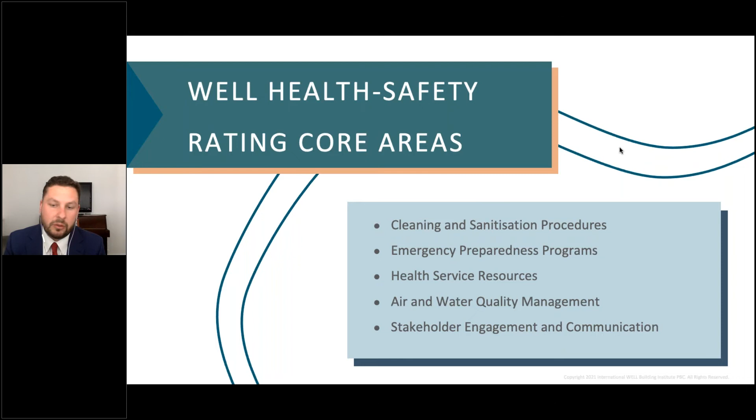The other thing the task force looked at was implementing something called the WELL Health-Safety Rating, which was a new rating that resulted out of the task force. And with this, there were 5 key topics the task force really recommended that we focus on in order to reduce the risk of COVID-19.

I don't have time to go through all of them, but one I wanted to touch on was air and water quality management. This isn't about designing new buildings—it's for buildings that currently exist and need immediate controls to understand their risk of COVID-19 and other respiratory infections. This group of strategies looks at how you can assess your ventilation right now, and assess and maintain your air treatment systems. It's not necessarily about installing new filtration systems straight away, but really understanding what your systems are capable of.

Unfortunately, a lot of facility managers and building managers aren't really sure what their systems are capable of. When COVID was emerging, many commercial organizations were offering new solutions to building managers, and many of them just weren't suitable for the systems they had. So really understanding your ventilation system is important.

Developing a Legionella management plan is also very important. For many buildings where there were significant lockdowns across a city or country, these buildings remained inoperational. That led to stagnant water within potable water systems—even in Australia, we've had incidences of Legionella from potable water systems when organizations returned after lockdowns.

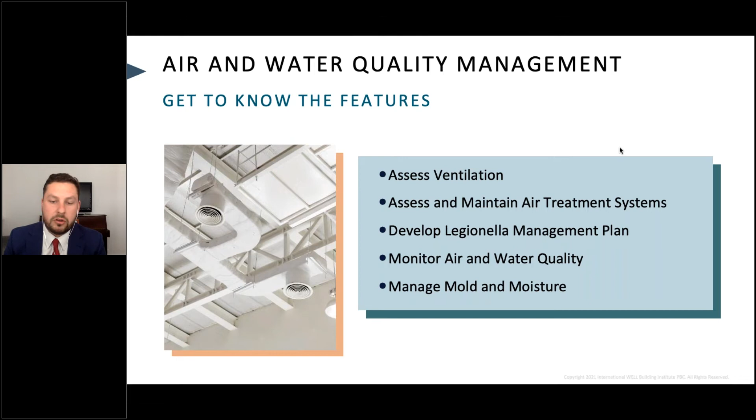And then we've also got things like monitoring air and water quality, and managing mold and moisture as well.

Finally, I wanted to talk a little bit about why organizations are prioritizing this—what are some of the global trends? Some of the key reasons organizations are suddenly looking at healthy buildings isn't because people suddenly understand healthy buildings really well, as much as those of us working in this space would like to think. It's more that this is becoming a demand from both investors and from the people who work for these organizations.

Something we're seeing is that even before the global pandemic, about 76% of workers reported struggling with their health and well-being. If the physical and social environment is the number one determinant of their health, then investing in buildings to make them healthier is actually a way of addressing workers who are struggling—making their experience at work far greater than it would be without those health and well-being interventions.

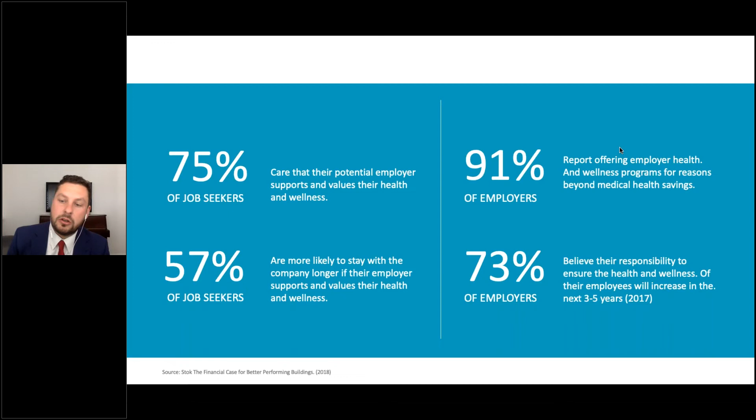This is definitely coming through. These statistics are pre-pandemic, and some would be even greater as a result of the global pandemic. This is becoming an expectation not just from Gen Z, but across all generations—job seekers are looking for organizations that care about their health and well-being. Employers are looking at how they can attract new talent and use health and well-being programs to enable this.

Many of you would be familiar with this: when you look at the costs of a building, about 90% of those costs are the salary or benefits of the people within it. About 9% is the rent or operations of the building, and about 1% is energy. That's not to say we shouldn't focus on energy efficiency or making our buildings more efficient, but I think we need to start focusing on how we can improve the experience of people within the building, because there are significant benefits associated with that.

ESG, the new framing of sustainability—environmental, social, and governance—is really being framed into two buckets: interventions that improve human capital or people, and interventions that improve climate change and the planet. These are not competing interests; they're complementary. All of the top building owners in the world are focused on both topics in order to demonstrate to their investors that they're taking sustainability seriously.

One thing we've seen particularly recently is the rise of social sustainability and the need for standardized health performance metrics as they relate to our built environment. Laura Craft has spoken about this—she said that during the last economic downturn, in 2009, 2010, environmental factors got their legs.

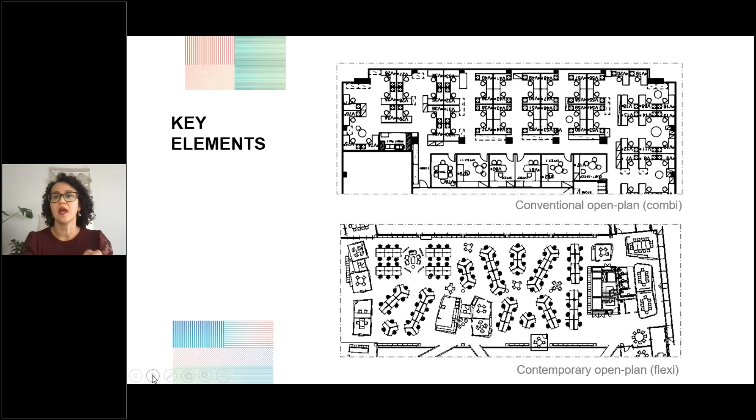Now, why and where to—that's where I'm more interested. As I said, I look at this as a problem that needs to be solved, and we're only going to learn how to solve it if we find solutions or situations where it's actually performing well. So I've been documenting spaces that, yes, are open plan offices, but from the user's perspective, somehow they work. I'll bring some of these elements into this presentation.

So when we're looking at where we are now, going back to the first question where I started, think about how and where you work, and think also about when, because post-COVID we are not necessarily bound to 9 to 5 anymore. Fingers crossed that continues. So I see this as where we are: you have the pre-COVID workplace, which we have a lot to learn from and is still very relevant, because of course we're moving back to HQ. But then you have this middle ground, the rise of the hybrid workplace, which has been perhaps over the last 2 years - that's actually where we are.